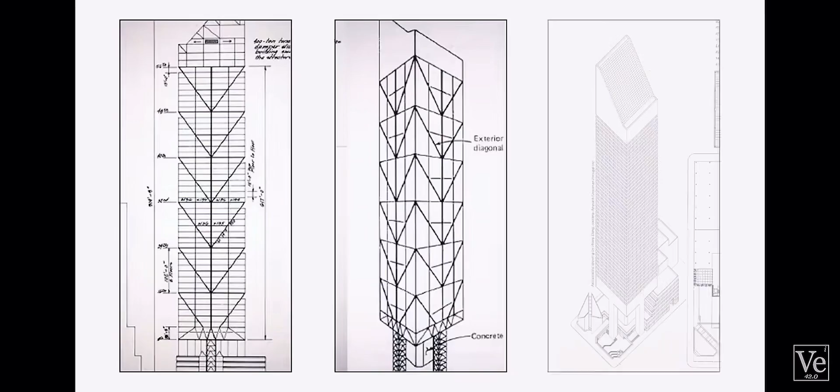This is Citicorp Center. In the summer of 1978, it had been open for less than a year when its structural engineer Bill LeMessurier made a terrifying discovery. His cutting-edge skyscraper, an engineering marvel, had a fatal flaw. Winds of just 110 kilometers per hour could cause it to collapse in the middle of Manhattan, potentially killing thousands. Over 200,000 people lived and worked in the surrounding area, and hurricane season was only weeks away.

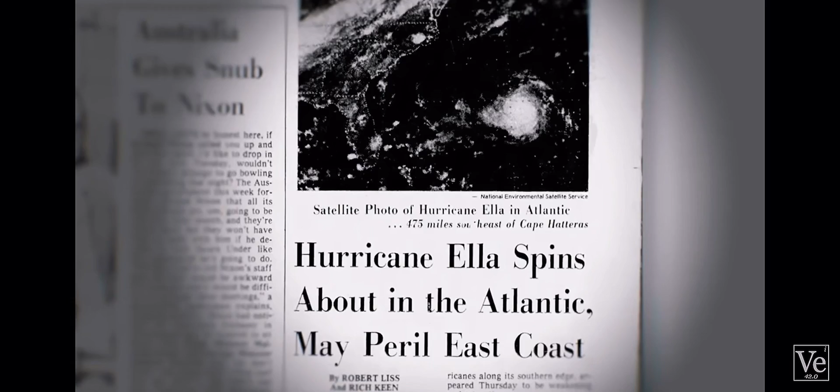Here I am, the only man in the world who knew this. This thing is in real trouble. LeMessurier faced a stark choice. He could stay silent and hope for the best, or he could try to fix it and risk professional ruin and mass panic. But Citicorp Center had a 100% probability of total collapse by the end of the century.

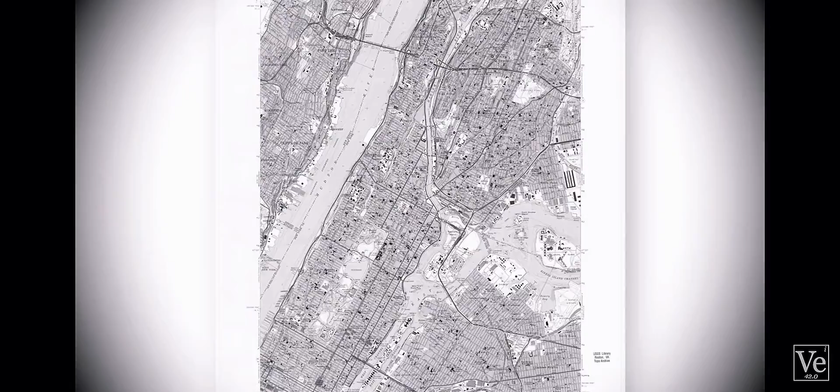How could he save New York from a near-certain disaster? And how was this allowed in the first place? Veritasium producer and engineer Henry Van Dyke traveled to New York to investigate further. So in the 1960s, the financial giant Citicorp was trying to build a new headquarters in Manhattan. So just down the street from their original headquarters was this entire city block, which was up for sale.

Well, everything except for this church, St. Peter's. So Citicorp came to the pastor, Ralph Peterson, and asked, "What's it going to take for you guys to leave?" And he came back and said, "We're not leaving. Anything that Citicorp builds has to involve the church as part of it." What the pastor wanted was for the church to have its own separate identity.

So eventually they agreed on two things. One was to replace this old, crumbling Gothic church with a brand new one, which you see in front of you. And the second thing was that the church had to be physically distinct from the new tower. In other words, it had to be completely independent. And again, most importantly, 2/3 of the space above the church had to be free and clear, had to be open.

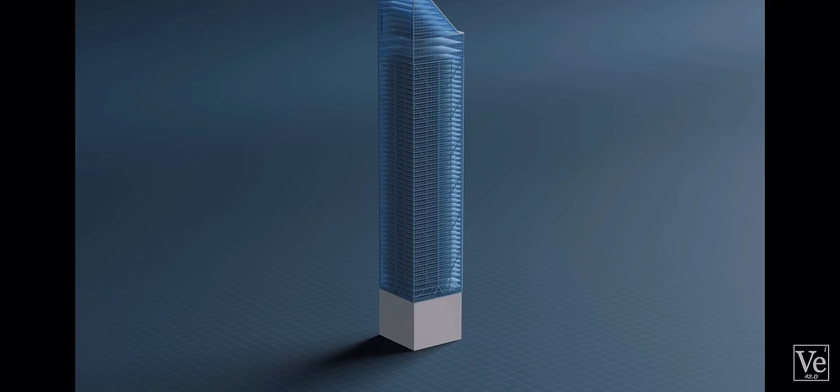Citicorp then hired architect Hugh Stubbins to design the tower and the church, and Bill LeMessurier as the structural engineer. Stubbins explained the constraints they faced. The church needed to be in the exact same spot, and they needed to build the tower around it. If they were to maximize the floor area, they would have to notch out one corner of the tower for the church.

LeMessurier agreed that could work, but why not notch 2, 3, or even all 4 corners, essentially constructing the skyscraper on stilts? So it's probably the first time in history that an engineer has come to an architect and said, "Let's make our job harder for us." The stilts would serve 2 main purposes. First, they would need to support at least half of the building's gravity load. The rest would be held up by a larger central column. Second, they would need to withstand the load due to high winds.

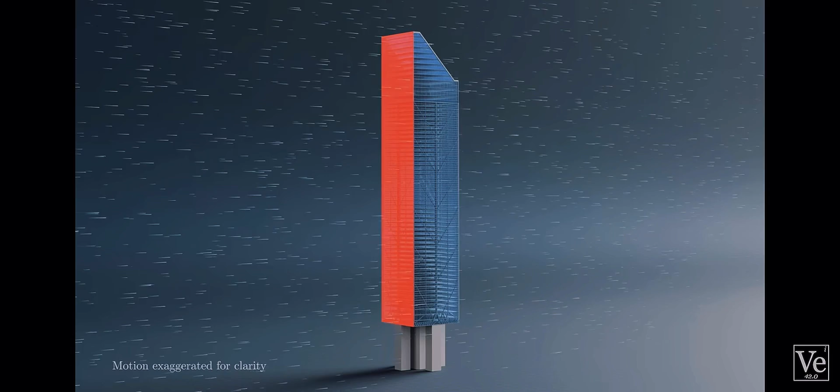But unlike an ordinary structure, the stilts wouldn't be at the corners. They would be at the center of each face. Imagine a chair, and instead of the corner of the chair, it's at the midpoint of each side. Obviously, it's not an ideal situation. It doesn't seem very stable. Exactly. So it created an engineering problem.

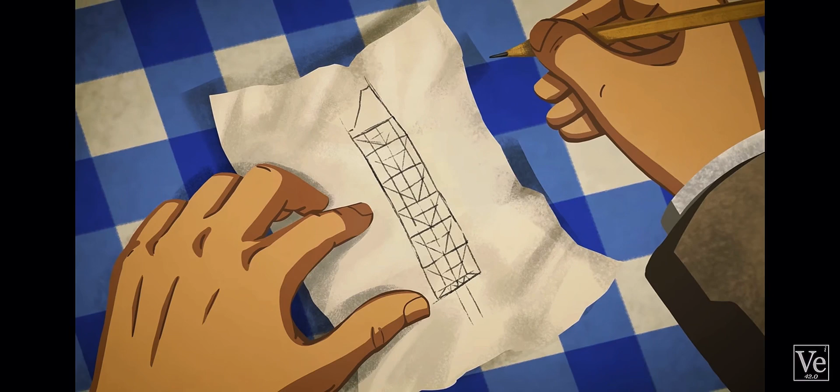As LeMessurier considered the problem, he suddenly had a flash of inspiration. He grabbed a napkin and sketched out an idea. He drew 6 layers of diagonal braces up each face of the tower. These chevrons would transfer the forces to the middle of each face and down to the stilts. Now we have to see the gravity loads, right? But now here's the trick.

The gravity loads are coming down the column. When they get to the brace, they need to find their way into the brace. Okay. So what you do is you take out that column right there. There is no way that load can jump over and go to that column. And now they're coming down into the braces, they get down to the bottom here, and now they continue to go down. You take that column out, it has nowhere to go except into the brace.

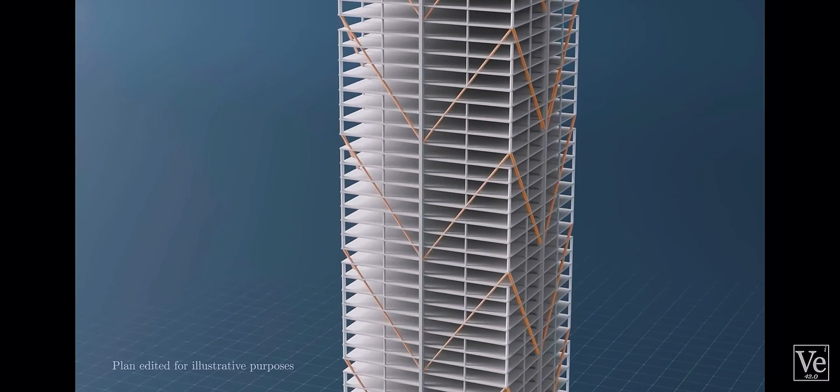By removing the columns at the top and middle of each chevron, every tier acted as a separate unit. They were only connected to the braces and through the central core. So every 8 stories, half of the gravity load would be forced through the chevrons to the mid-face columns, leading down to the stilts.

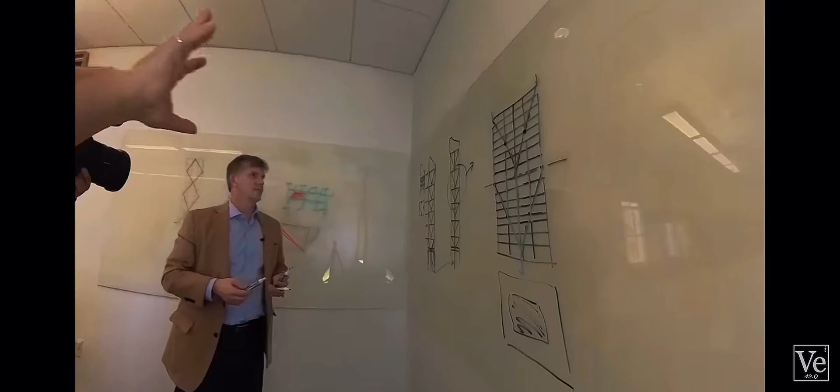Can you tell me how big of a new idea was this? Yeah, well, this particular system was entirely unique, driven by the placement of the columns, driven by the conditions of the building. Satisfied the chevrons could transfer the gravity load, LeMessurier turned his attention to the second problem, the wind.

When wind hits the left side of a normal building with corner columns, the entire frame deforms like this. So to reduce this deformation, we could strengthen these joints. But there's a better way. Because beams and columns are much stronger in compression or tension than they are with bending loads. So if we add diagonal bracing, they can carry this horizontal load.

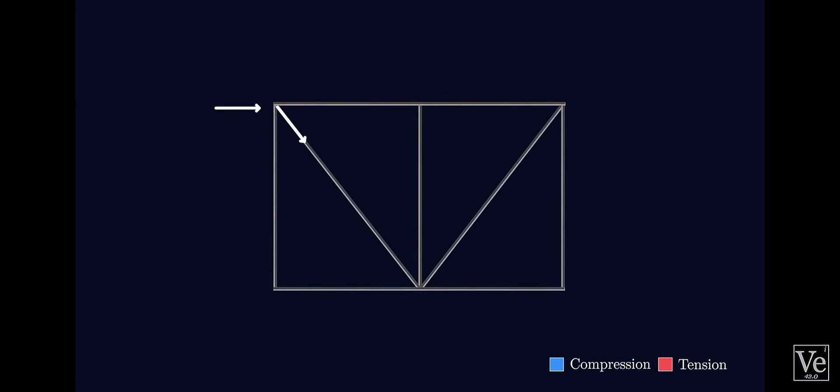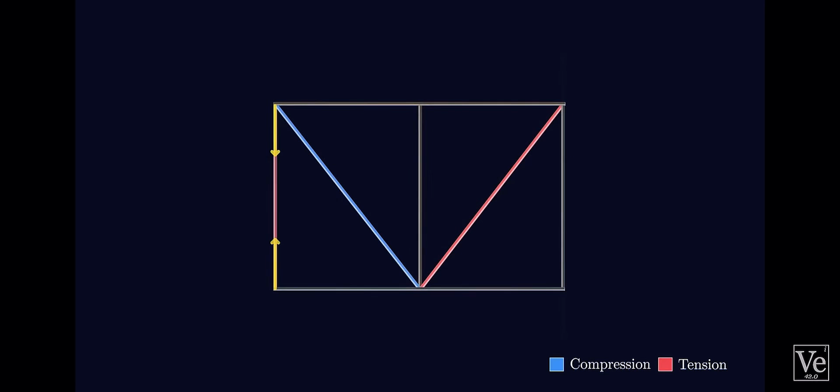The beams sort of act like springs, and when they're compressed, they push on the joints. When they're stretched, they pull inwards. With braces like these, the wind load compresses this diagonal and stretches this one. The left column pulls down in tension, and the right column pushes up in compression. Where the braces meet, they both push the bottom beam to the right. This stretches the left side and compresses the right one.

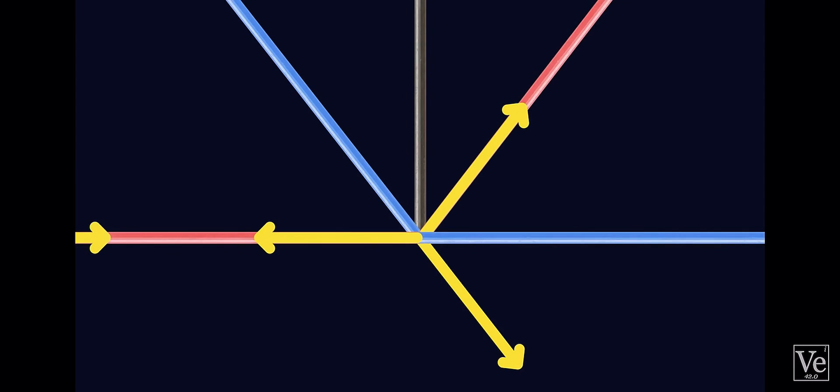But this floor is the top of the next chevron, so this lower section is carrying the force from the layer above it, and the normal wind load from the side. And this keeps happening at every chevron, so the wind load builds up as you go down the building. But Citicorp can't have corner columns like this because of the gravity load, so in the wind, this entire triangle wants to rotate like this.

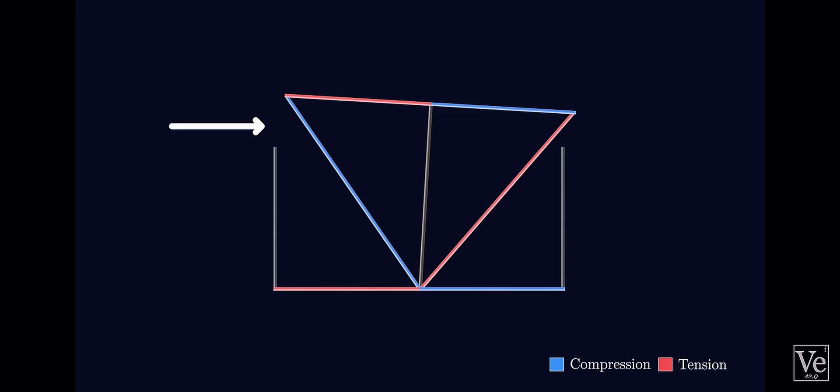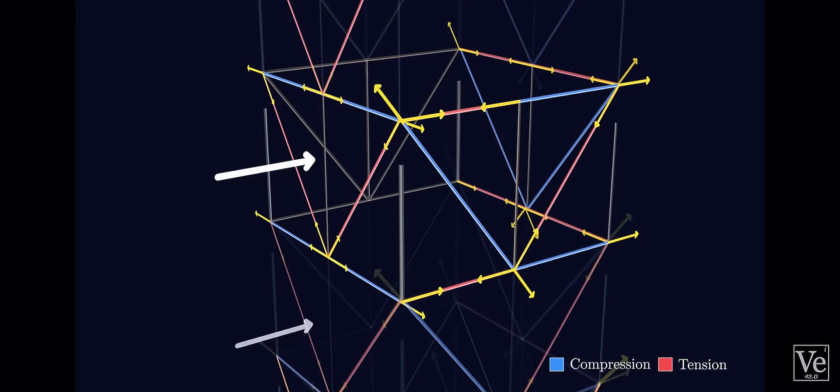And to prevent that from happening, this chevron pulls down by going into tension, and the far chevron pushes up in compression. The top and bottom beams are again forced into compression and tension. The wind load ends up wrapping around the entire building, so every chevron works to transfer the wind load to the section below. When we think about skyscrapers, how big of a deal is wind?

If we made a skyscraper here, out of all these different things, you push with your phone, you get a certain amount of force. But then you push on my phone as well with a certain amount of force, but your phone is also pushing on my phone. And so that's the shear in the building, what we call the building shear. It increases as you go down the building. At the 10th floor, you may have a smaller force than at the 60th floor, but the total force of the 10th floor is carrying everything above it. So it's much bigger than what's going on at the 60th floor.

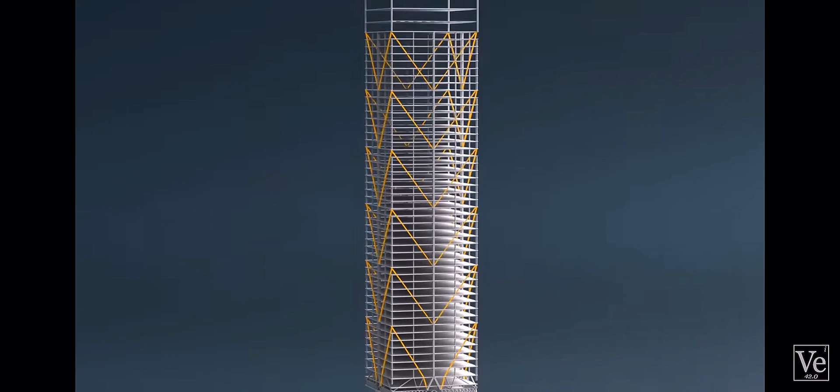So these chevrons were key to LeMessurier's design. But the braces were massive, almost 40 meters long end to end. So even if you could fabricate a steel brace that long, there would be no way to get it through Manhattan. So instead, it was sent in pieces to be welded together on site. The chevron bracing solved the wind and gravity load issues, but it also created a different problem.

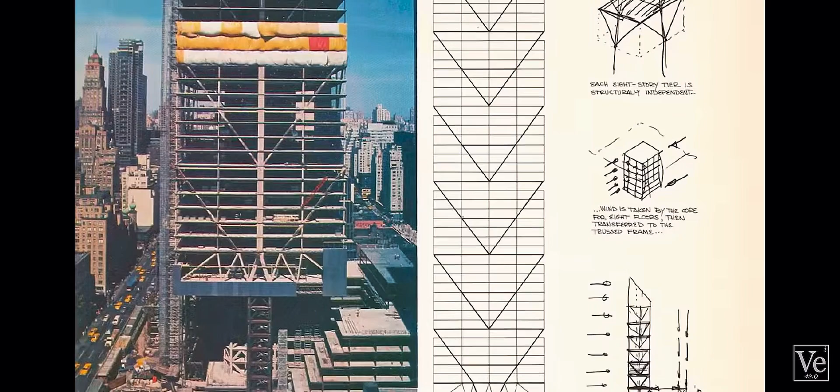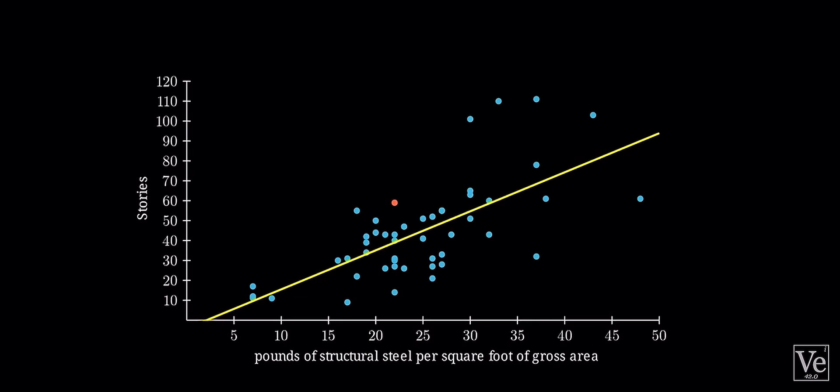Because of the chevron bracing system, they were able to save a lot of money and weight. It was a lighter construct than most other buildings in New York. I think it was 22 pounds a square foot, which is very light. Unfortunately, that made the building swayable. It could move in the wind. That wasn't necessarily a structural problem. It could have been uncomfortable for the patrons.

The way they could solve this was just, let's add more structural steel and make it a lot stiffer. But the solution that LeMessurier came up with was far more elegant. He adopted something that had been regularly used in bridges, power lines, and ships, but never before in a building: a tuned mass damper, or TMD.

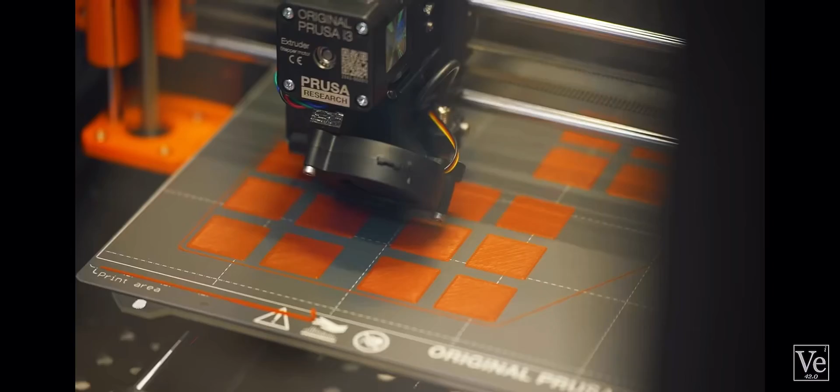So we're here at Stark Laboratories, and I'm not with Iron Man, but instead the Columbia Space Initiative, a student team here on campus who has helped us build this incredible tuned mass damper kind of system. We'll use this cart to represent a building. By pulling it back and releasing it, we can excite its resonant frequency. And then we'll put on a little pendulum, aluminum rod, and a mass at the bottom.

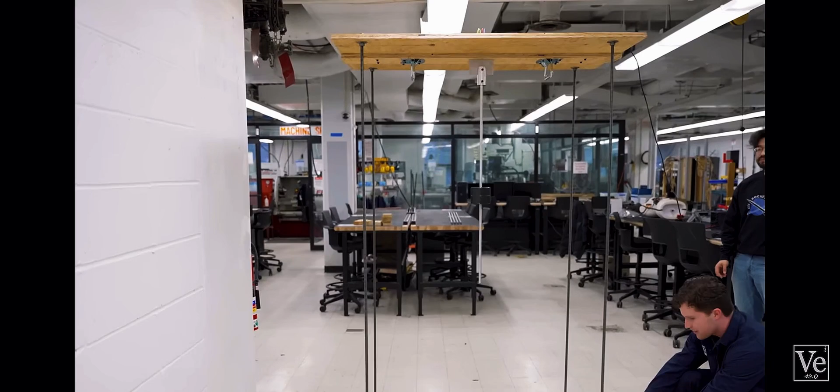As the building sways, it transfers some of its kinetic energy to the pendulum, which starts to swing. Then some of its energy is dissipated through friction at the hinge. The pendulum and the building oscillate out of phase from each other, so every time the building pulls the pendulum in a different direction, more energy is lost, significantly damping the sway of the tower. But this system needs to be carefully tuned so it has the same frequency as the building itself and the right amount of friction.

So first, the mass needs to be at least 1 to 5% of the building's weight to be effective, and we tune the frequency of the TMD by adjusting the length of the pendulum. I assume engineers do math around this thing, but we're just doing it by feel.

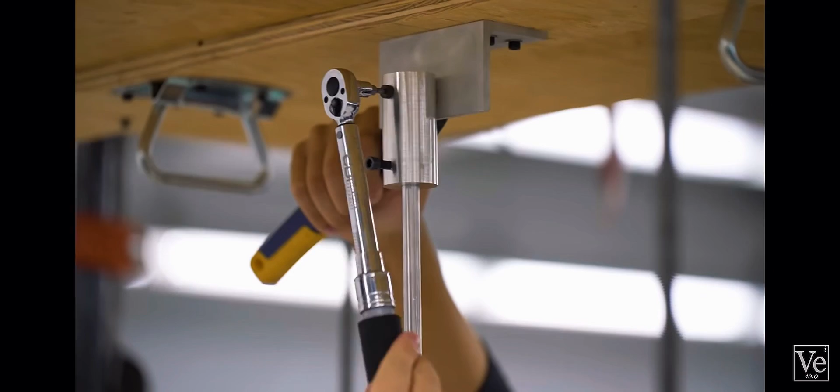Second, by loosening or tightening the bolt, we can tune the amount of damping. We need to dissipate more energy from friction at the hinge to stop the swaying faster. We just tighten this top bolt to make the whole system add a little bit more resistance, and we'll see if we can dampen it now further.

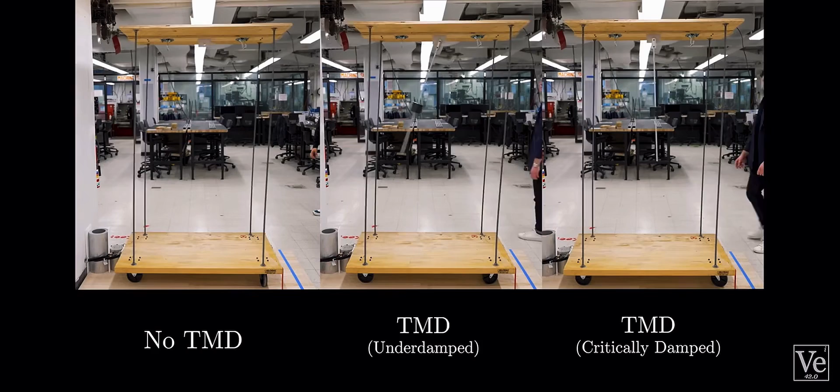Ooh, much different, yeah. Yeah, that looked great. That was so quick. Yeah, that was. It is cool when an experiment works.

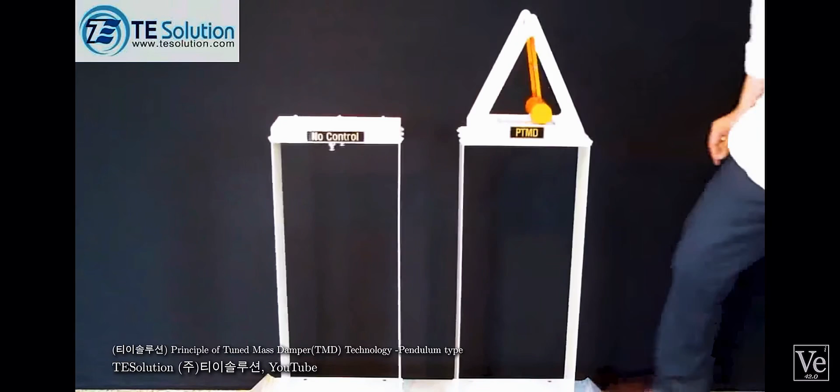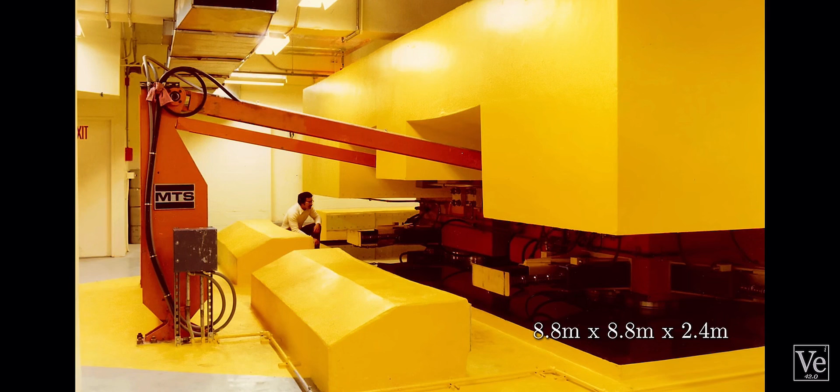Does not always happen. There are many different types of TMDs, like pendulums, liquid columns, and a large mass on springs. LeMessurier used this last one in Citicorp. What you see is a mass of concrete which is 29 feet square and about 8 feet thick and weighs 400 tons. It was installed on the top floor, and it's affectionately known as that great block of cheese.

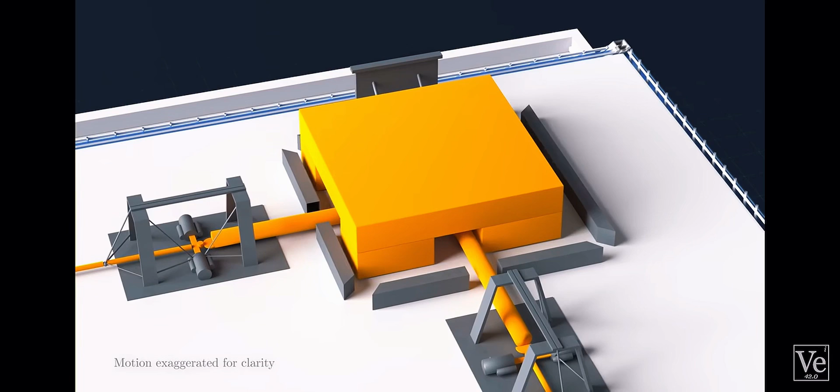As Citicorp sways to one side, the block starts to move in the same direction. Some energy is dissipated through separate viscous dampers. Citicorp's oscillations are damped through those energy losses as the block oscillates out of phase to the building's motion.

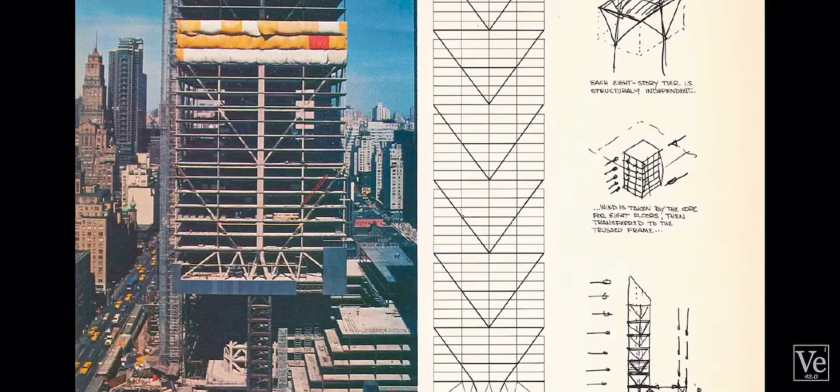Lemessurier expected the damper to reduce the amplitude of swaying by roughly 50%, and he saved around $4 million by not needing an additional 2,800 tons of structural steel. With both the chevron bracing to channel forces to the stilts and the tuned mass damper to reduce sway, Lemessurier was convinced the building was structurally sound.

On Citicorp Center's opening day in 1977, it was the seventh tallest building in the world. It was described by the press as an acrobatic act of architecture. Later, the American Institute of Architects even gave it an honor award, calling it a tour de force as a stylish silhouette in the skyline, and for the pedestrian, a hovering cantilevered hulk.

So then it's going swimmingly for years, right? Well, it's going swimmingly for about a year. But the first hint of trouble came in May 1978. Lemessurier was talking with another client about welding similar chevron braces. The architect and the steel fabricator said, tell me, how did those welded braces work out? Seems like overkill, they thought.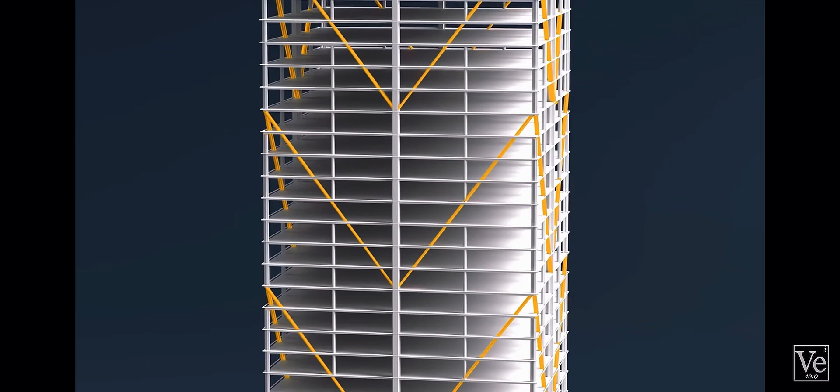And Lemessurier says, yeah, they were fine. Let me call my guys in New York and I'll check. So he put the call into his office in New York and they say, oh, Bill, didn't you know? We bolted those connections. The contractor had suggested saving $250,000 by using bolts to attach the braces instead of welds, and Lemessurier's firm had agreed.

There is nothing that says a bolt is inherently worse or better than a weld. You use them in different circumstances for different reasons. But it's a little surprising to find out. I thought the connections in this tour de force, one-of-a-kind skyscraper, that's on the cutting edge of structural engineering, were connected one way, but apparently it's connected another way.

But if the braces are going like this, where are they going to go? You only need the weld when the braces are going like this. Since the gravity load was always compressing the braces, some of the chevrons only went into tension under very high winds, and even then, it wasn't a lot of tension. Lemessurier trusted that his team did the right calculations, and the substitution was fine.

Late spring, early summer of 1978. Bill Lemessurier is working on the Back Bay Hilton Hotel that in plan forms a triangle, not a rectangle. Now you got a triangle, what's your orthogonal direction?

You just have to give up and say, we're going to analyze it from every direction. That's going on the moment that Bill LeMessurier gets this phone call. Then I called him back and pointed out to him that there's some peculiar things about this building. The worst loading case was not the diagonal, but it was this ordinary wind that everybody thinks about. The wind pushes straight on the building. That was the critical case.

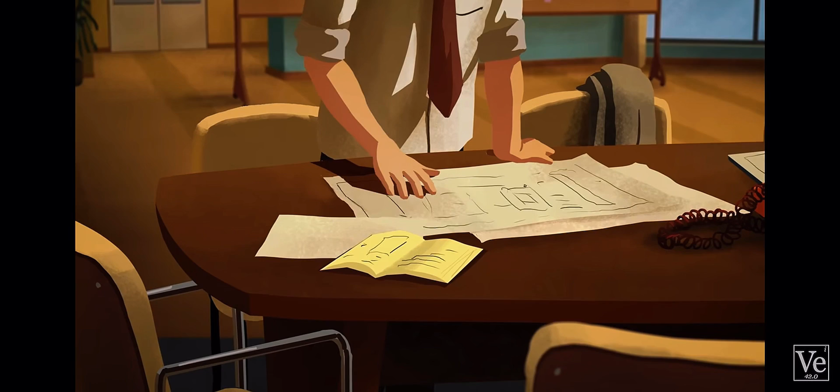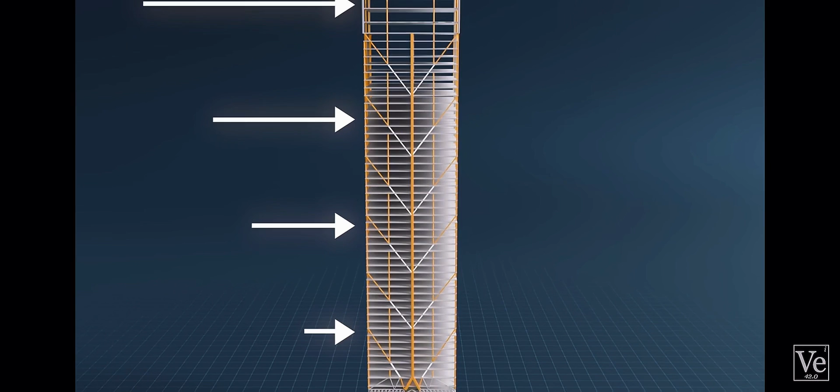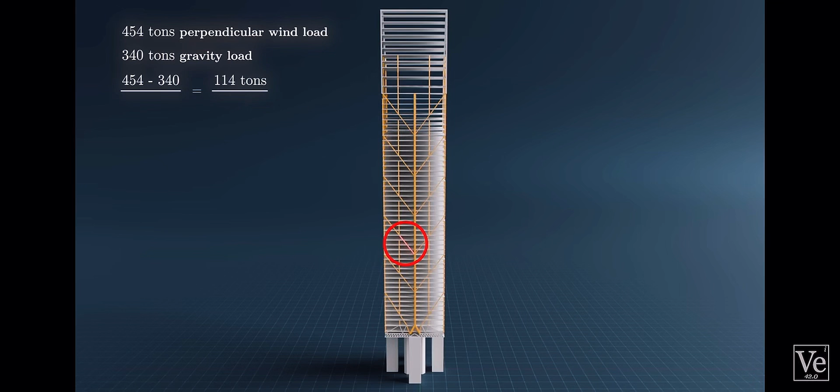LeMessurier requested the building diagrams and pored over all of the connections. He looked at how his firm calculated the number of bolts. There was no question they had taken the straight-on wind, not the diagonal wind. Although wind speed is highest at the top of the tower, the wind shear builds up as you go lower. Looking at this brace around halfway down the tower, the perpendicular wind load is 454 tons. Because of the skipped columns, all of these braces carry the same gravity load, just 340 tons, from the 8 stories above. The gravity load builds up in the center column, not in the braces, which means there are 114 tons of tension in this brace. If each bolt can withstand around 28 tons, that would require 4 bolts. The original calculations said just 4 bolts were enough, so that was all they used.

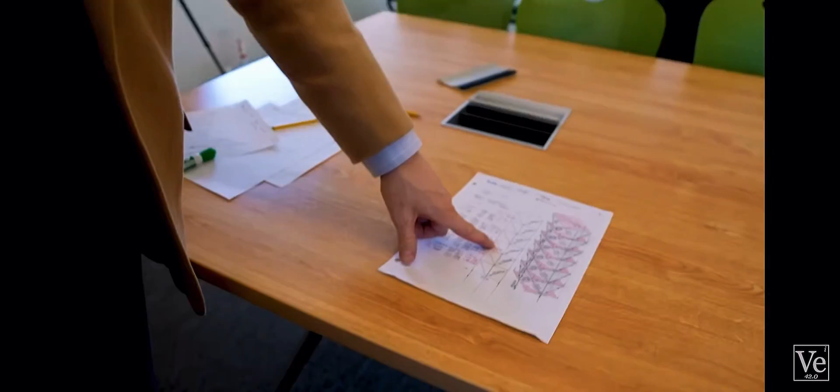But when he added quartering winds, LeMessurier's calculations showed there were some braces that needed far more bolts. At this particular part of the building, which I can show you on my calculations, is right about here. And Bill LeMessurier talked about the 30th floor. I always wondered, why was it the 30th floor? The 40% increase from quartering winds means that this brace has a wind load of 635 tons. The tension in the brace is now 295 tons, over double the original calculation. So these braces actually need around 10 bolts, not 4.

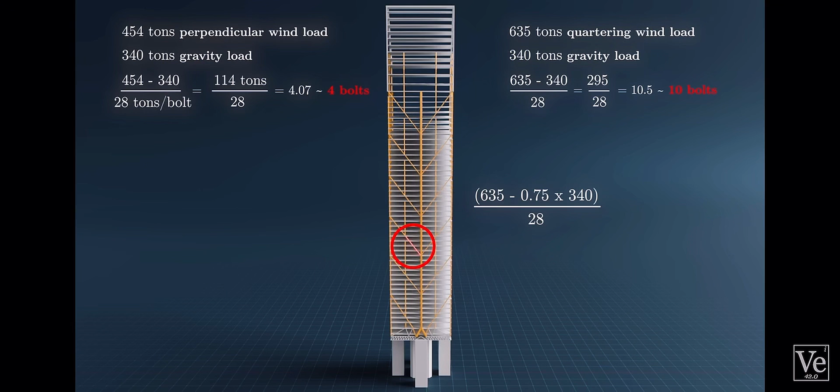But then it turned out they had done something else. LeMessurier's firm considered the braces to be minor structural elements. They didn't use the right factor of safety to calculate the number of bolts. They should have overestimated the tension in the brace by underestimating the gravity load. With only 75% of the gravity load, the tension in the brace is now 380 tons. So they really needed 14 bolts, but they used only 4. This thing is in real trouble. You imagine what Bill LeMessurier was thinking at that moment. You see that number, and you're like, oh my God, this is serious. It's really serious. LeMessurier was starting to panic.

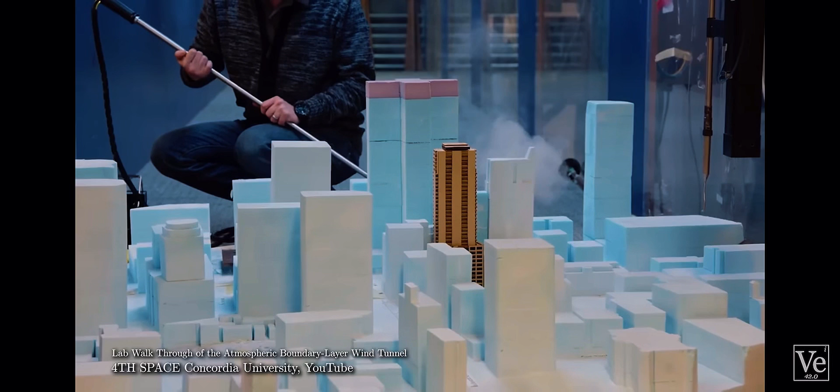He didn't want to rush to conclusions, so he flew to Canada to check his calculations with Alan Davenport at the Boundary Layer Wind Tunnel. After running more tests, they found that it was even worse than LeMessurier thought. The estimated 40% increase in stress was technically correct, but LeMessurier made his calculations assuming the building wasn't moving. But the wind tunnel gave LeMessurier a dynamic analysis, how the forces change when the building is moving around. To LeMessurier's horror, the wind tunnel analysis showed that the stresses could increase up to 60% more than originally anticipated.

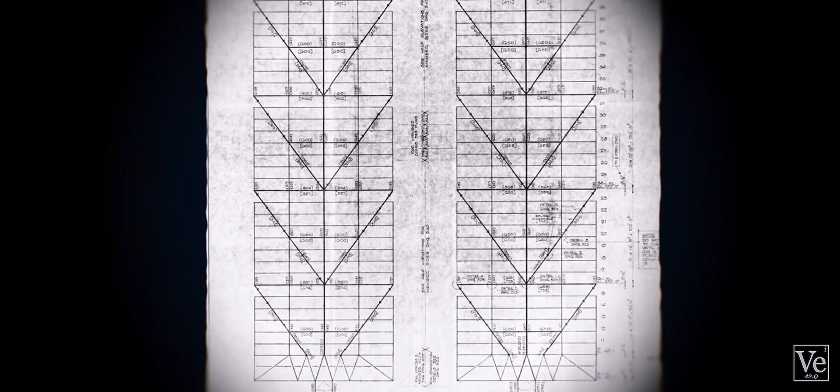LeMessurier squirreled himself away in Maine and worked through the data from the wind tunnel again, joint by joint on every floor. The weakest joints were at the building's 30th floor. If those failed, the entire building would fall. But what were the chances that a storm strong enough to topple the building would pass through New York City?

LeMessurier dug through the historical weather reports. On average, a storm strong enough to tear the building apart occurred every 16 years, and then even 110 km/h winds blowing for just 5 minutes would collapse the building. In any given year, the chance of a storm that size happening was 1 in 16. Just 1 year before Citicorp was completed, wind gusts of 110 km/h roared through New York City as Hurricane Belle passed through. What do you think this moment was like for LeMessurier when he ran these calculations?

It must have been devastating. I mean, I can't imagine the fear. I can't imagine the feelings. It just must have been truly a moment he never thought he would live through. That storm was going to happen in his lifetime. And since this was July, it could happen the summer of 1978.

LeMessurier needed to decide and decide fast, but revealing this mistake could mean lawsuits, bankruptcy, and professional ruin. He could stay silent, only Davenport knew and he wouldn't reveal anything, or he could entirely disappear. In a later interview, he admitted, "I did say to myself, I could drive down the main turnpike at 100 miles an hour and deliberately drive into a bridge abutment. That would be the end, and all of this would go away. I thought about that."

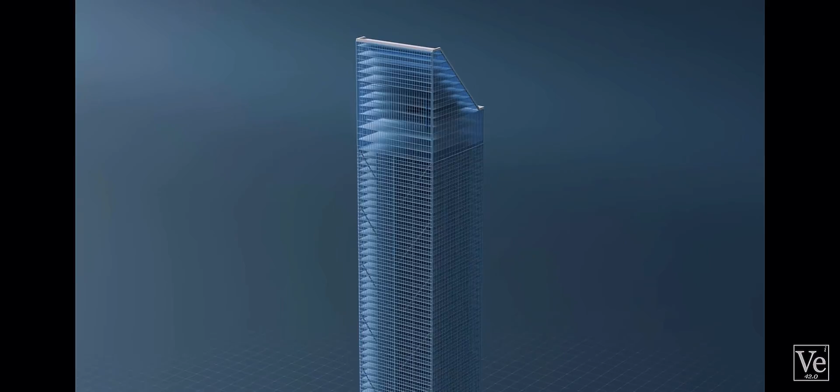But there was a 1 in 16 chance of collapse that very fall. With thousands of lives at risk, there was never any other choice but to act. After speaking to a few lawyers and other engineering experts, LeMessurier told the architect Stubbins, and together they informed Citicorp's chairman, Walter Wriston. Within hours of that meeting, LeMessurier acquired emergency generators for the tuned mass damper. The TMD was originally designed to stabilize any swaying for comfort, but now it became the crutch that the tower leaned on. LeMessurier pinned all his hopes on it.

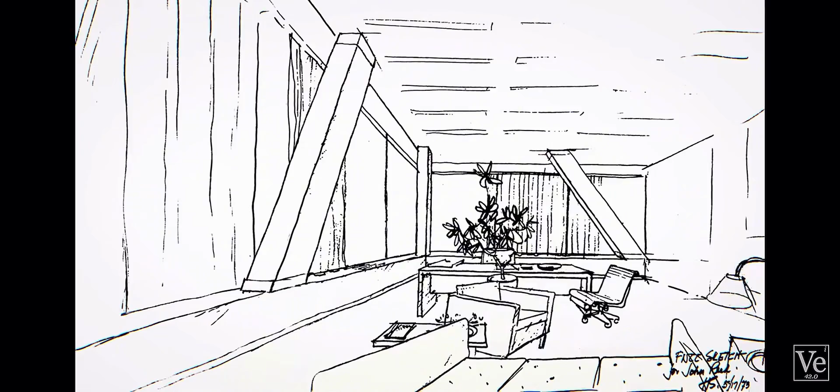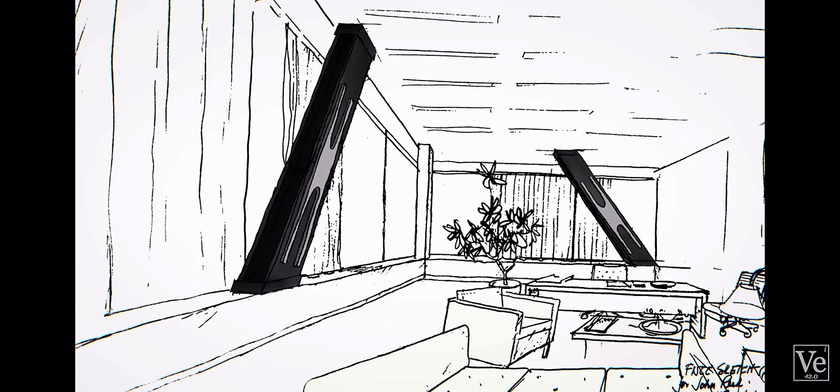He called the confidential repair plan Project Pandora, but that sounded ominous, so he came up with the Special Engineering Review of Events Nobody Envisioned, or Project Serene for short. Each night, welders would enter the building after everyone left, rip off the sheetrock around the chevron beams, and then weld two 5-centimeter thick, 2-meter-long steel plates on each joint. Like Band-Aids, literally Band-Aids on both sides of these joints. After, they'd replace the wall and clean everything up before the office workers came back the next morning.

They needed to weld over 200 joints, and LeMessurier ranked them by importance, starting with the ones on the 30th floor. But the repairs wouldn't be completed before hurricane season, so Citicorp worked with the Red Cross to develop a 10-block evacuation plan. How many people were at risk in the building, and if it fell, would it affect other buildings? Were there chances of it leading to something more disastrous?

Absolutely. This would have toppled. And it would have toppled into another building, which would have toppled into another building, which would have continued a horrific process. So it was untold what the ultimate effects could have been. I mean, just the evacuation plans were... Thousands. The building itself housed thousands. And then the residents and the businesses surrounding the building, it was into the thousands.

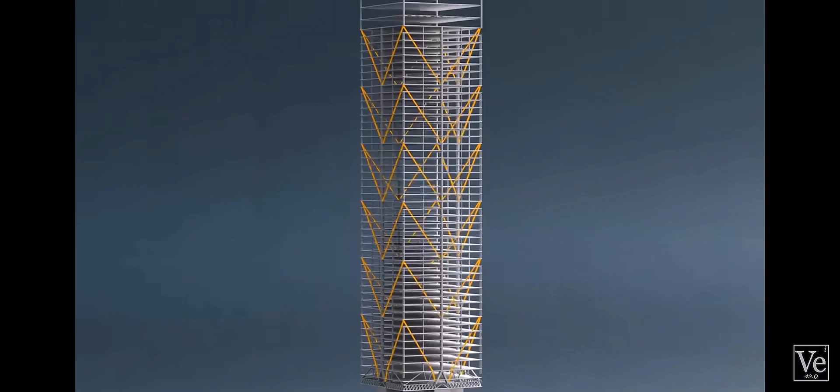Despite the risk, they decided not to tell the public, or even the office workers in the building. No one wanted a mass panic. Instead, they fitted strain gauges on important structural members. The gauges monitored the skyscraper's every bend and twist from a comm center 8 blocks away. At least that would give them a little bit of warning. But this plan required new telephone lines, doing this for months. So Citicorp's chairman immediately called AT&T's president, and the lines were installed the next morning.